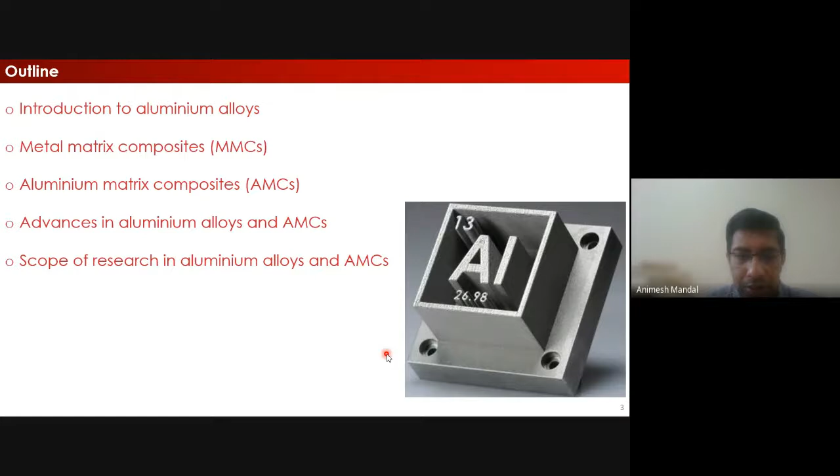As you must be aware, there is a great push for the use of aluminum alloys, especially with this Make in India initiative, and a great push for the manufacturing sector. So aluminum alloys are finding more and more use, and lots of investments are coming into this particular class of alloys. After steel, it's probably the aluminum alloys where lots of funding is going to come in the next few decades. That's the projection as far as aluminum alloys go.

To begin with, a very brief introduction to aluminum alloys. Aluminum lies somewhere here, and if you are aware of aluminum alloy literature, a good number of alloying elements have been added to aluminum to increase its properties, because aluminum is a very soft metal. Pure aluminum is very soft, right? It has a Vickers hardness of around only 20. So in order to increase the strength, corrosion resistance, and many other properties - nowadays people are also talking about high thermal conductivity aluminum alloys - different elements have been added to achieve properties up to various levels: silicon, phosphorus, you name it.

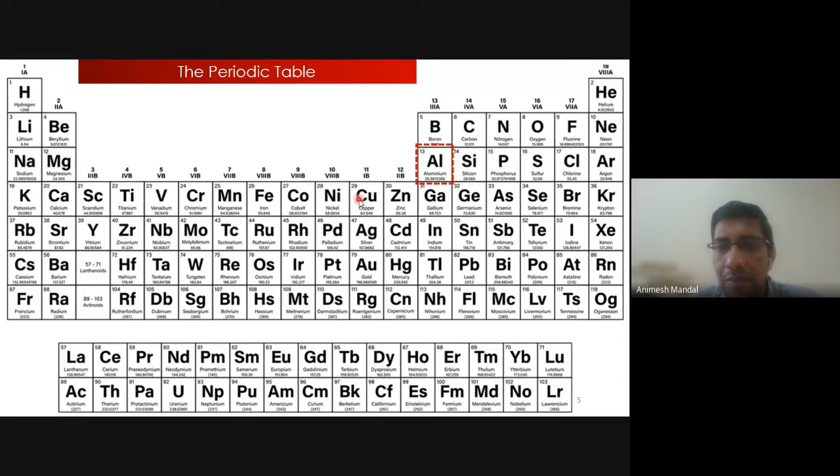So most of these elements have been added, so that interaction has been well studied, but there's lots of scope even more to study. With the advent of more and more advanced characterization techniques, new information is being revealed about your aluminum. So as far as your metals go, aluminum is considered a new metal because it was discovered quite late compared to copper, iron, or other metals. So aluminum is relatively a new metal in that sense.

So if you see the major elements which are added to your aluminum alloys, the major alloying elements added are copper, manganese, magnesium, silicon, zinc. Of course, lithium is not that common, but as far as ASM classification goes, it's still remaining. But these are some of the very frequently added major alloying elements.

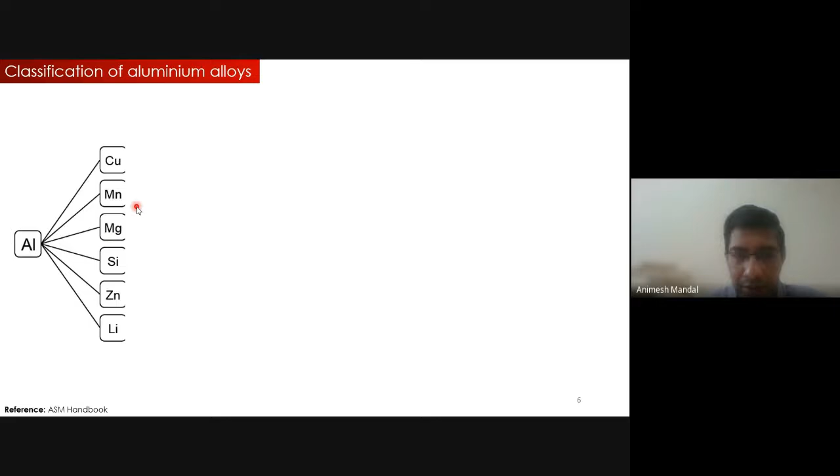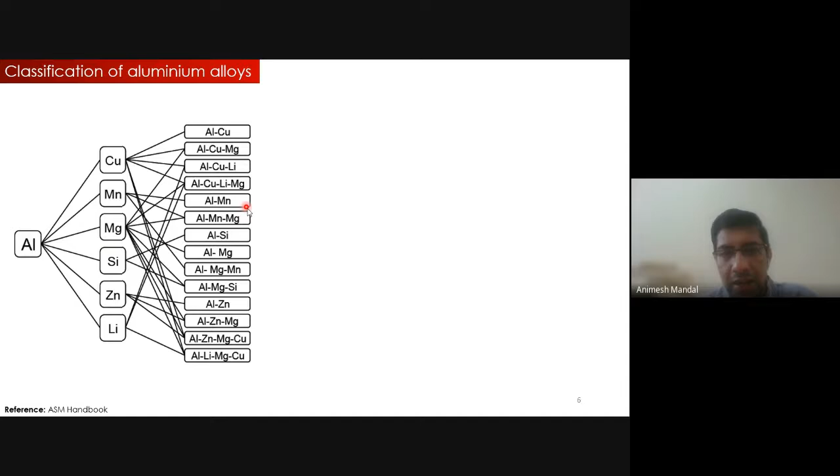So accordingly, you can have a range of aluminum alloys which can exhibit a wide range of properties. When I say properties, mostly we are referring to mechanical properties, but it could also be other properties as well. So depending on whether I can cast my aluminum alloy or not, or whether it can be further deformed, we have two broad ways of classifying these aluminum alloys. One is the cast aluminum alloy, and there's a certain ASM designation which is followed. I will not read out one by one since that's going to take a lot of time, but you can see these are some of the alloy designations.

So for example, let us pick the 2 series. When I say 2 series, it means that the major alloying element is copper. You can have other alloying elements as well, but the major alloying element is copper. Likewise it follows for others. There are certain unused series as well till date, and if we have any other alloying elements which do not fall in this particular category, you can club them under your 9x series. So that is how you classify.

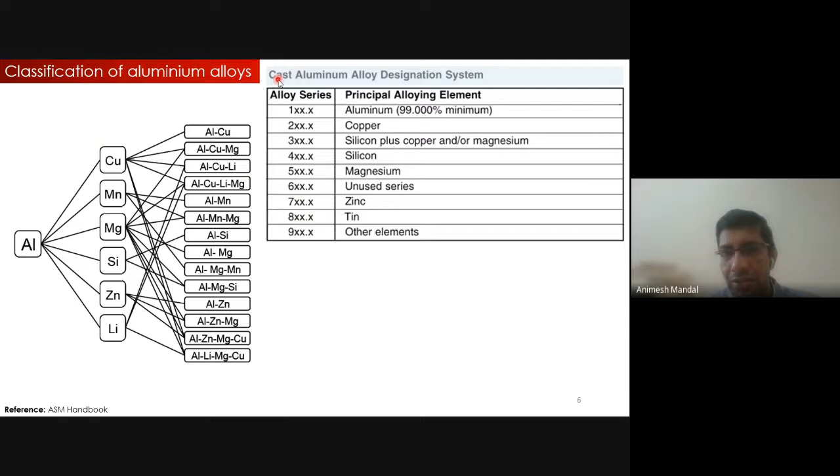It's nothing but a 3-letter designation followed by 1 decimal. These decimals also have some meaning, but I think we will not have so much time to discuss. If you have any doubts, we can discuss later on.

Then coming to the wrought aluminum alloys. As I say wrought aluminum alloy, it simply means that these are not the final product. In fact, they are the semi-finished product. That means it could be an ingot, it could be a billet, which needs to be further processed using some, say, mostly a plastic deformation operation like rolling, extrusion, forging, or any other plastic deformation for that matter.

And here, if you see carefully, this is a 4-letter designation. That's the nomenclature which we follow for your wrought aluminum alloys. Again, suppose let us pick one, say the 5 series. When I say 5 series of wrought aluminum alloy, what it means is that it is a magnesium-containing alloy. That means magnesium is the principal alloying element. Of course, you may have other alloying elements as well, but magnesium is the primary alloying element. That's how you need to understand.

So cast and wrought - all metals for that matter can easily be categorized into a cast category as well as a wrought category. Cast simply means that casting is the means by which you produce the end product, whereas in wrought metals, it means that you can further deform them to get the end product. So that's how you distinguish between a cast and a wrought aluminum alloy.

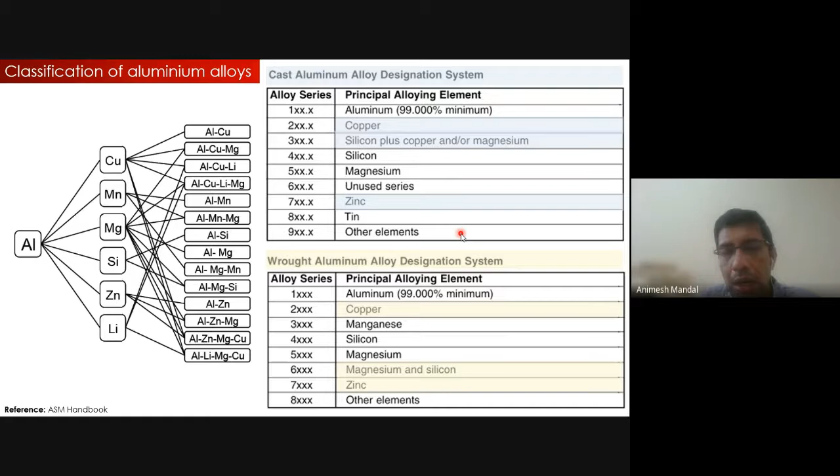When we teach students, we talk about different precipitation mechanisms which lead to hardness of these alloys, or increase in strength. So one thing is very important to understand: the solubility of these elements in aluminum impacts the properties of these aluminum alloys. That's very, very important.

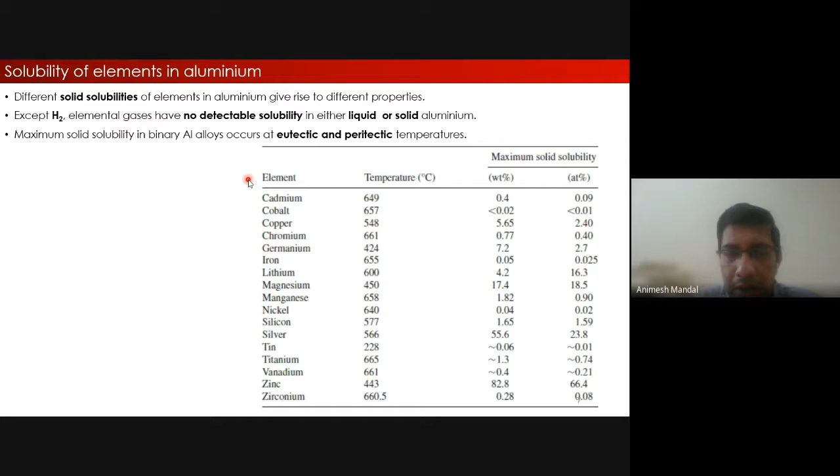That means if you do not remove this hydrogen before you cast this liquid aluminum metal into your molds, you're going to end up with different kinds of defects related to porosity, blowholes, wormholes - so many kinds of defects. That's why hydrogen is quite undesirable in your aluminum alloy. So you need to find a way to drive out this hydrogen from your molten aluminum. That's very, very important.

So that's one of the very key things when we talk about your aluminum alloy, when we talk about melting and casting of aluminum alloy. So that has to be kept in mind.

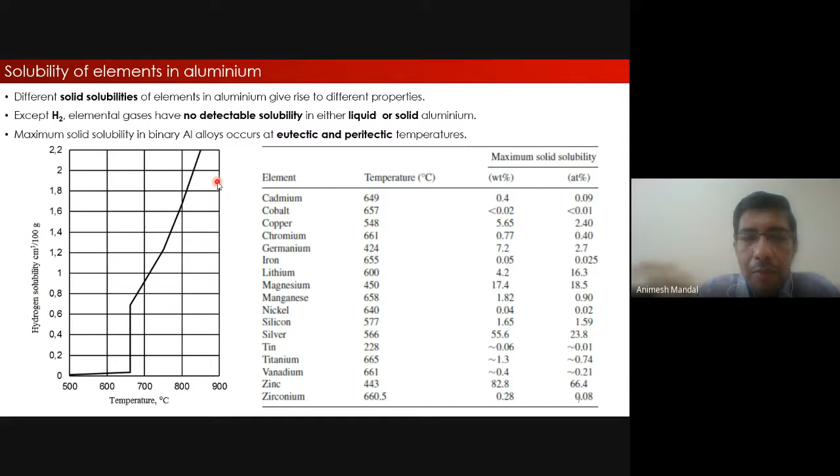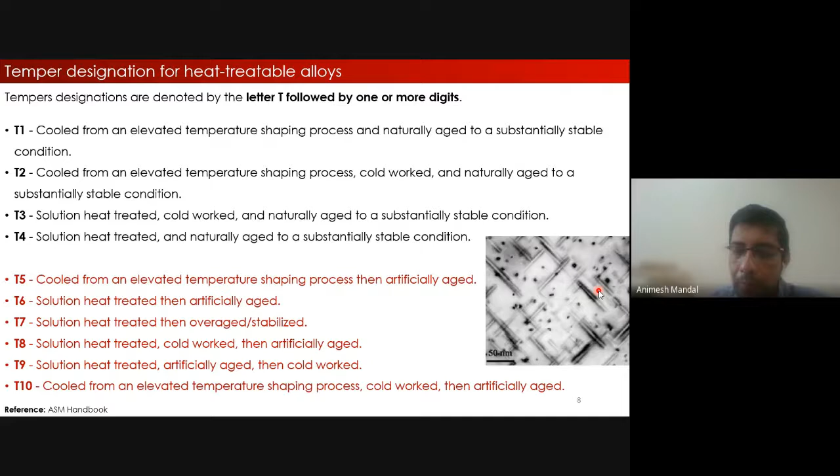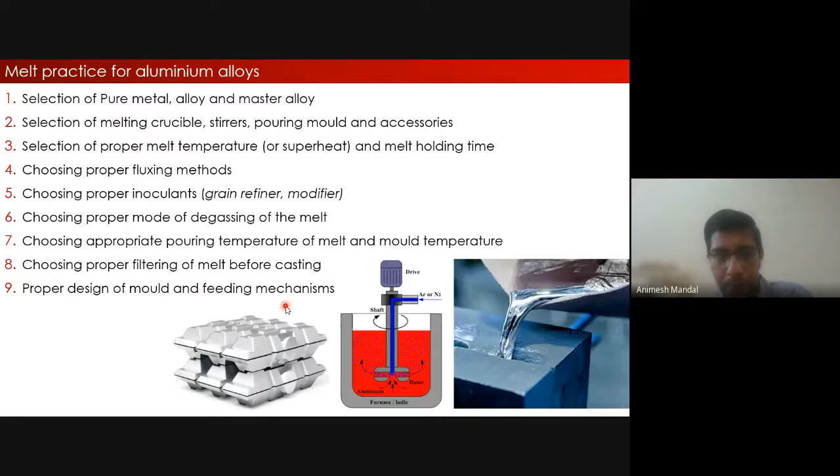So there are a series of steps which you need to follow so that you can get a really good microstructure, and most importantly, a defect-free casting. That's very, very important. If you have any doubts, you can ask me later and I can explain it to you.

Now going to a little bit of basics - I remember last time when I presented in one of the FDPs, I explained it in detail, so I'll quickly go through this.

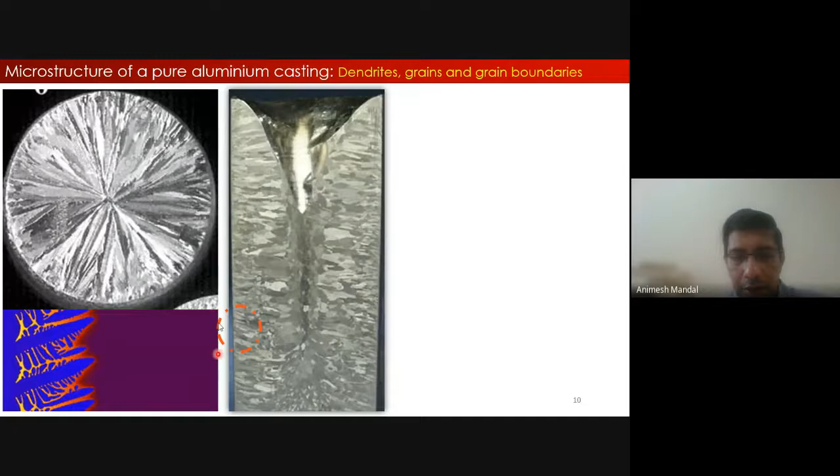For example, this is the casting, and this is the mold wall or die wall, whatever you can call it. Whenever solidification starts from this mold wall, what we get is essentially the formation of dendrites. These are called primary dendrites, and you have branching from the primary dendrites - those are called secondary dendrites.

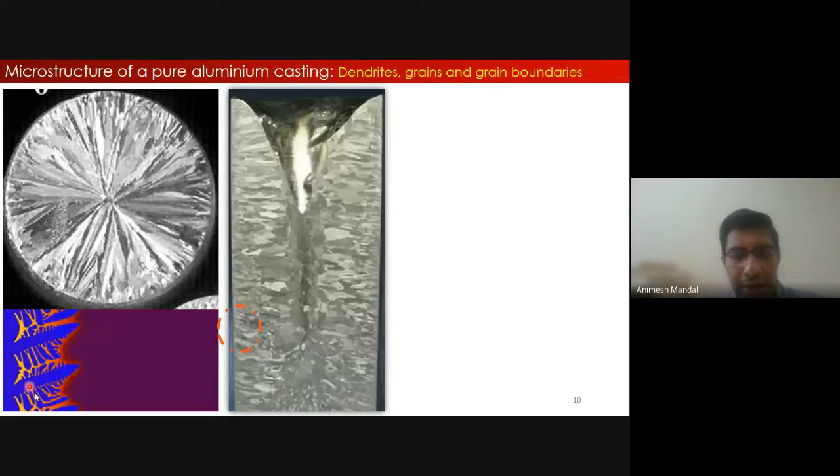The manner in which this particular phenomena - the growth of the dendrites - can be controlled is dictated by several factors. There are many factors which can control whether I will have a long elongated grain or if I can manage to have an equiaxed grain. That's possible to do using different techniques or processes.

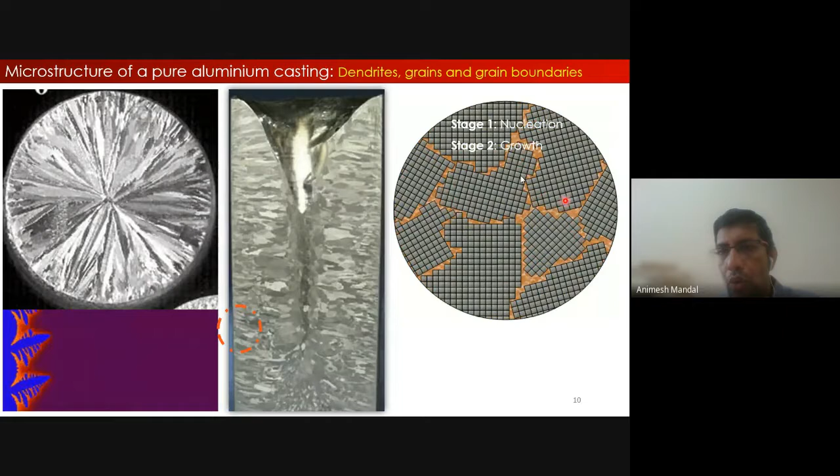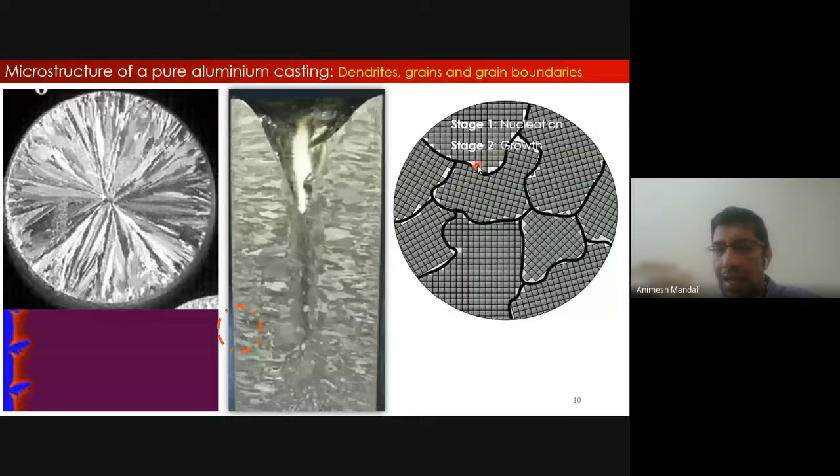Any solidification process can be divided into two broad phenomena. One stage is the nucleation stage, where some nucleation has to occur, and then the atoms get attached one by one in a periodic arrangement, thereby generating grains and grain boundaries. That's how the concept of dendrites, grains, and grain boundaries comes about.

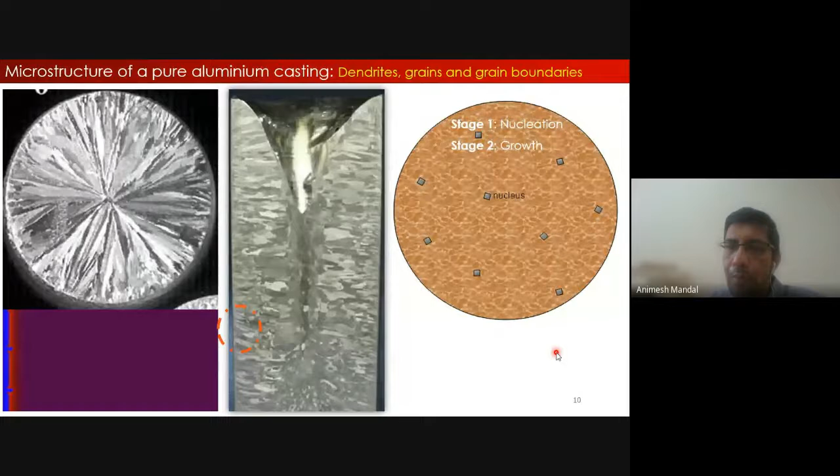Why is this of such significance? Because all of these have a very important role to play when you talk about the properties of your materials, be it any property for that matter.

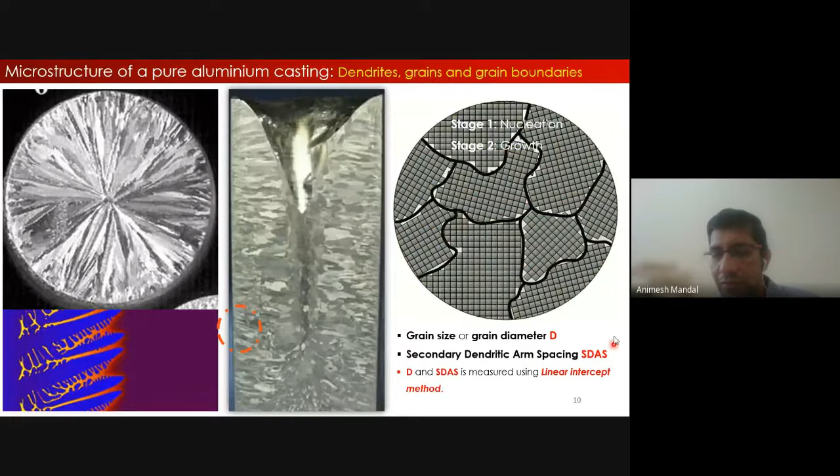So here we are mostly focusing on mechanical properties, though it could be any property. You need to precisely estimate the grain size or grain diameter, and also quantify the secondary dendritic arm spacing, which is the spacing between secondary dendrites. There are many techniques for this, one of the most popular being the linear intercept method. You need to take lots of frames of the microstructure, and nowadays there are softwares which give you these values, because you need to quantify the microstructure so you can relate it with the properties you get. That's very important.

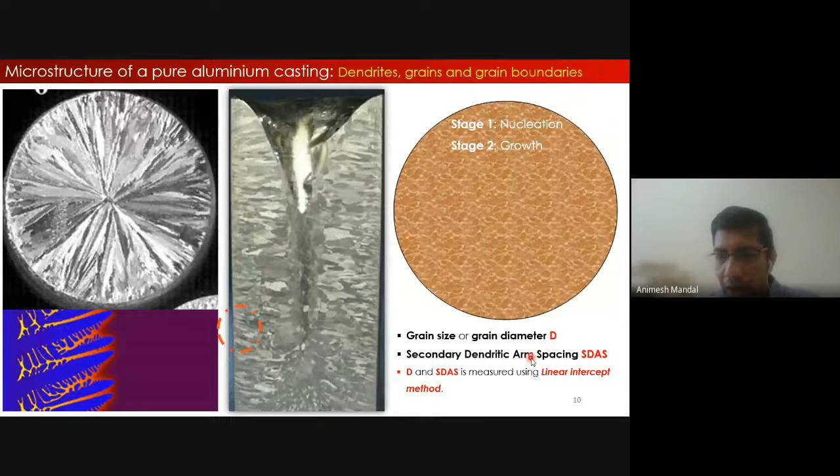So this is the basic about dendrites, the origin of dendrites, grains, and grain boundaries. Refining these grains is very important. There is an equation called the Hall-Petch equation, which talks about how the yield strength of a material is related to the grain size. As you have smaller grains, you expect to have higher yield strength in a material. So the basic idea of any metallurgist or material scientist is always to reduce the grain size of a material.

For example, this type of grain we call coarse columnar grains. How does this transformation occur in the first place? It's not going to happen on its own. You need to add something to this particular molten alloy, that means to this molten aluminum alloy, and thereafter, after solidification, you can expect this type of grains.

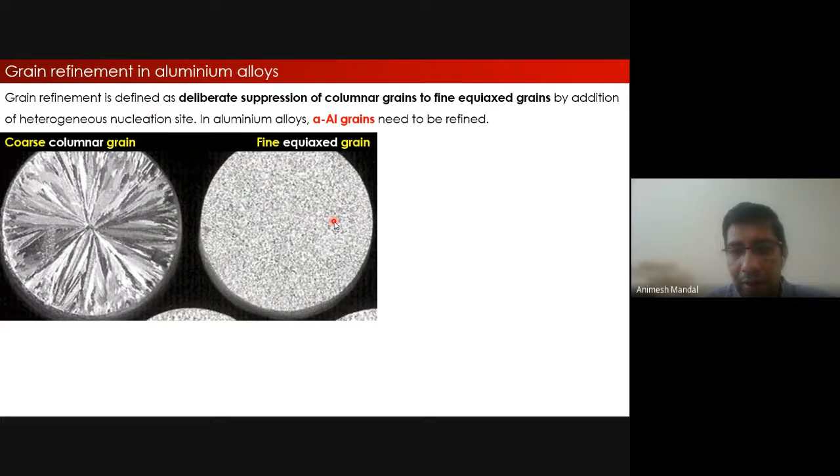So what is to be added? Certain particles, like Al3Ti in aluminum, and then there are certain particles like titanium diboride. They are very commonly added so that these particles act as substrates for nucleation of your alpha aluminum grains, and thereby you generate a fine grained material which is expected.

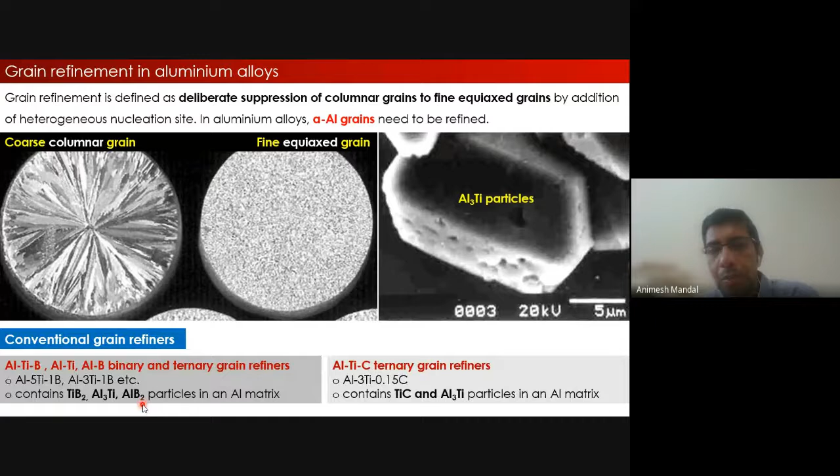Now there are so many kinds of grain refiners which are added. Traditionally you have aluminum titanium boron alloys which are added, aluminum titanium alloys which are added, and aluminum boron alloys are added. So all these binary and ternary alloys are added.

So what does this alloy contain? This alloy essentially contains these particles, and these particles, when added to the molten aluminum, act as substrates for nucleation of your alpha aluminum, and thereby you generate a fine grain material. So that's the basic understanding, and this mechanism is called heterogeneous nucleation.

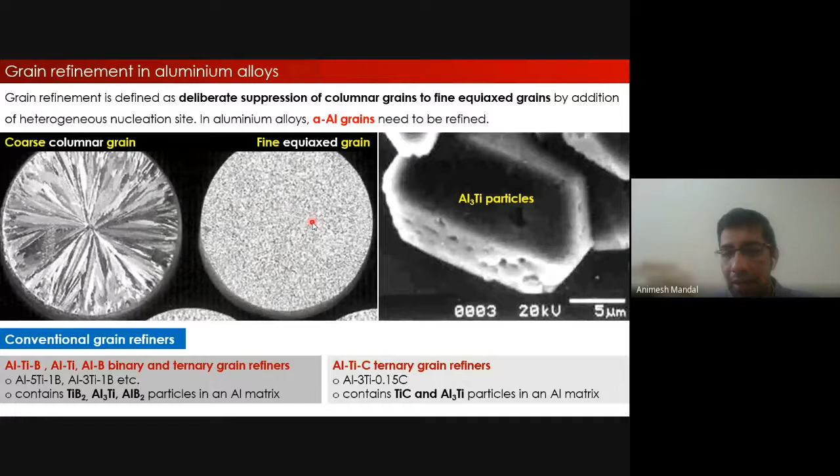Traditionally these are the types of grain refiners which have been used, such as aluminum titanium boron based or aluminum titanium carbon based, but all of these have certain merits and demerits, and that's why there is a need for new grain refiners. So many foundries are still working to develop newer and newer grain refiners so that you can get a very, very fine grain material.

This is something which is desirable, you don't want this kind of microstructure. So why do we need fine grains? Though we spoke about strength, it's not only the high yield strength that is improved by having a fine grain structure.

If you have fine grains, your toughness improves. There is something called hot tearing, meaning you will not see any cracks on the surface of the castings. Then if you have fine grains, you also have a uniform distribution of the other phases, uniform distribution of the microporosity. You can also improve the extrudability of that particular alloy, and machinability increases many folds, and as a result you get good surface finish.

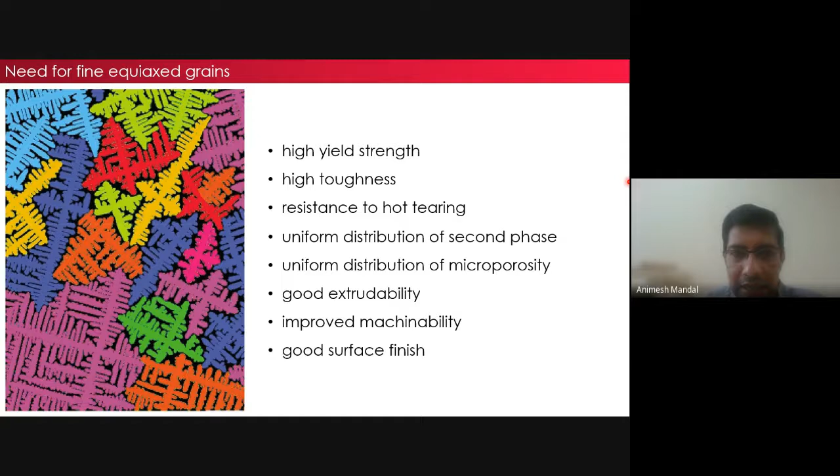So generating a very, very fine grain material is very crucial to achieving a good casting. That means for all the foundries, the very objective should be to refine the grains as much as possible. Some of the casting techniques used for wrought aluminum alloys include many casting techniques, but these are two very important techniques used worldwide. One is your direct chill casting, where you produce huge ingots or billets.

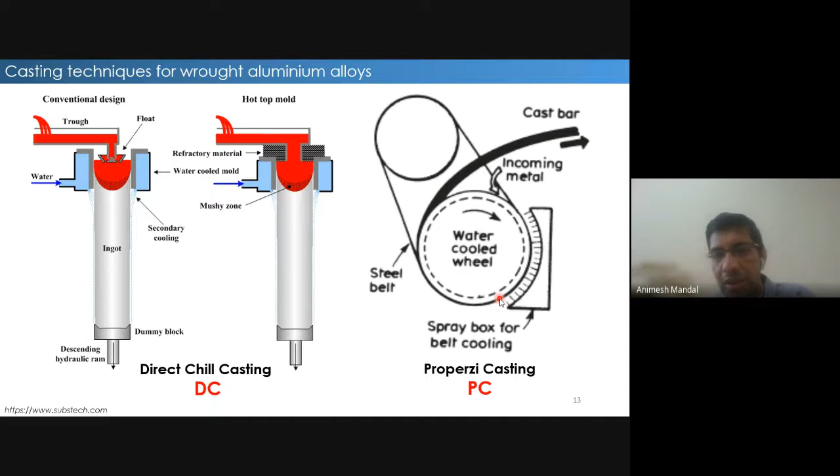So these are the two techniques which are majorly used for producing these wrought aluminum alloys, because which has to be further deformed. Just to share you the pictures, you can see.

So this is how your DC cast ingots look. These are the actual DC cast ingots which you are seeing here, and these are the Properzi ingots. You can see it's almost rectangular in cross section and long elongated. These can be further deformed, whether it may go to a forging plant, a rolling plant, or any other plant.

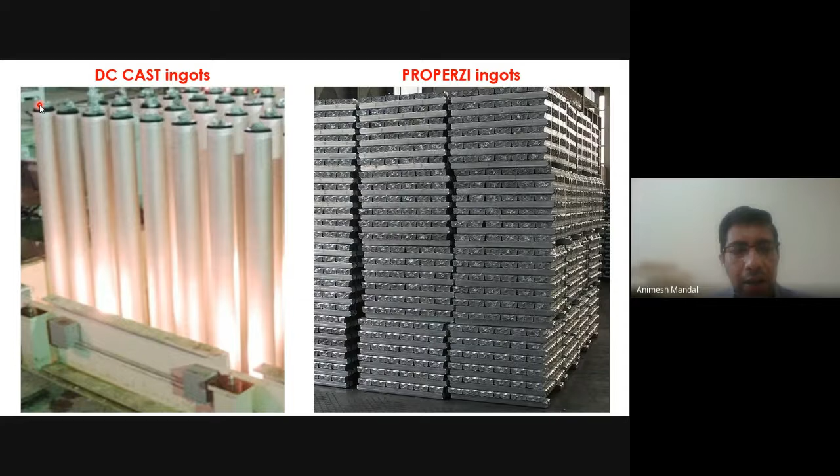So the process looks quite simple, but there are lots of challenges to make this. Almost you can see it's a defect free sample. To make this, of course, requires lots and lots of science and technology has gone into making a defect free sample.

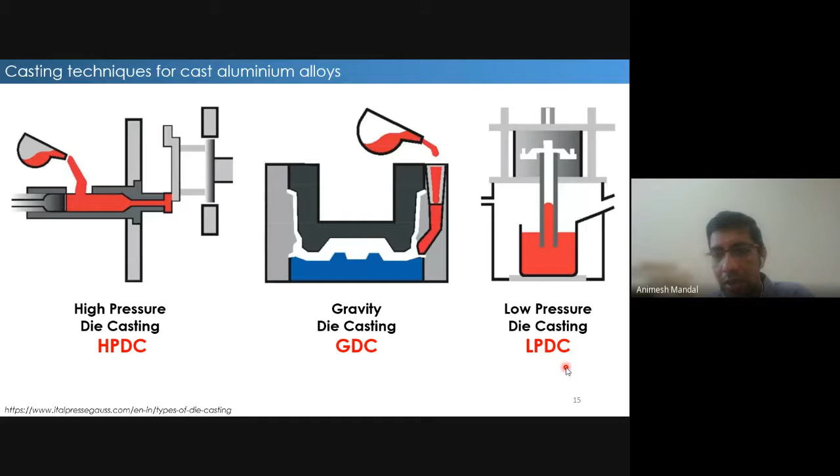Industries use these processes quite profusely. Among these cast aluminum alloys, the most popular systems are your aluminum-silicon alloys. We hardly use any binary alloy for practical purposes, so it's a multi-component alloy, and the most important alloying elements added to aluminum-silicon alloys are magnesium, copper, or a combination of copper and magnesium.

That's very commonly used, because if you add magnesium and copper, or both, you impart precipitation hardenability to the alloy. Aluminum-silicon alloy by itself is not precipitation hardenable, but the moment you add magnesium, it generates particles called Mg2Si, and you can create precipitates of Mg2Si. Similarly, if you add copper, you can create precipitates of Al2Cu.

Likewise, if you add both, you can have different kinds of precipitates. So essentially, by adding these alloying elements, you're converting a non-heat-treatable alloy into a heat treatable alloy. Why is that important? Because you can increase the strength of these alloys through proper heat treatment.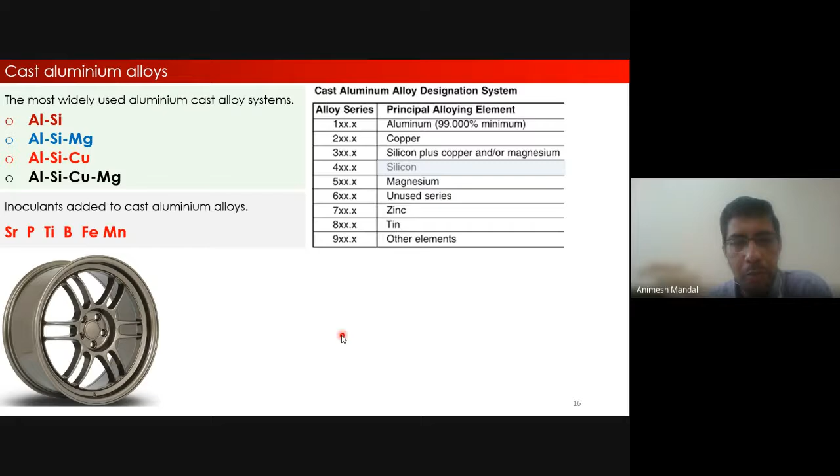If you recall the basics of a binary phase diagram, the aluminum-silicon alloy has a eutectic composition. The alloys towards the left of the eutectic are called hypoeutectic alloys, and the alloys towards the right of the eutectic are called hypereutectic alloys. Accordingly, the microstructures can vary.

The silicon present in eutectic as well as hypoeutectic alloys is needle in shape, almost needle-like. In hypereutectic alloys, in addition to the needle shaped silicon, you also have primary silicon, which is quite coarse. Both of these morphologies, the needle shape and the polygonal primary silicon, are generally not desired in this kind of alloy.

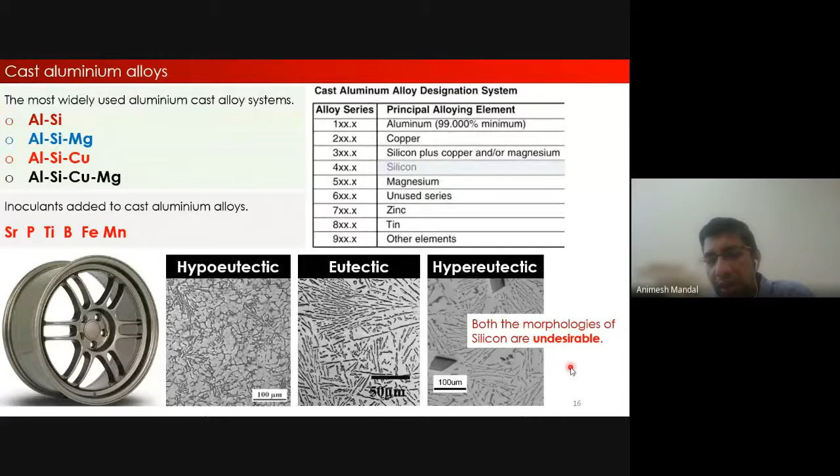So how do you modify this morphology? You can modify the morphology of the needle shaped silicon as well as the polygonal primary silicon using elements like strontium and phosphorus in different amounts. This is something you need to understand: a very trace amount, maybe on the order of a few ppm, is good enough to change the morphology of these alloys.

So this is, in very brief, about your wrought aluminum alloys and cast aluminum alloys. Whenever you hear about cast aluminum alloys, the first alloy system that should come to your mind is the aluminum-silicon alloy. It's the bread and butter of the casting industry, because most casting processes demand very good fluidity or castability, and you have to have silicon in it, because addition of silicon improves the fluidity of the alloy for various reasons.

Now coming to your metal matrix composites. As all metallurgists as well as mechanical engineers must be aware, you deal with a good amount of composites.

So like a lot of people work on polymer matrix composites, and a good amount of people work on ceramic matrix composites. But here what we are going to discuss briefly is the metal matrix composites, in short we call that MMCs.

If you see the scenario of MMCs, this is a Scopus document which I tried to grab. You can see there is great interest in MMCs. Though this data is till 2015, it shows a steady rise. There is great demand for MMCs, and this shows the number of publications year wise. Initially, work on MMCs picked up maybe in the late 80s. There you can see a surge in use of MMCs, not only publication wise but even use wise.

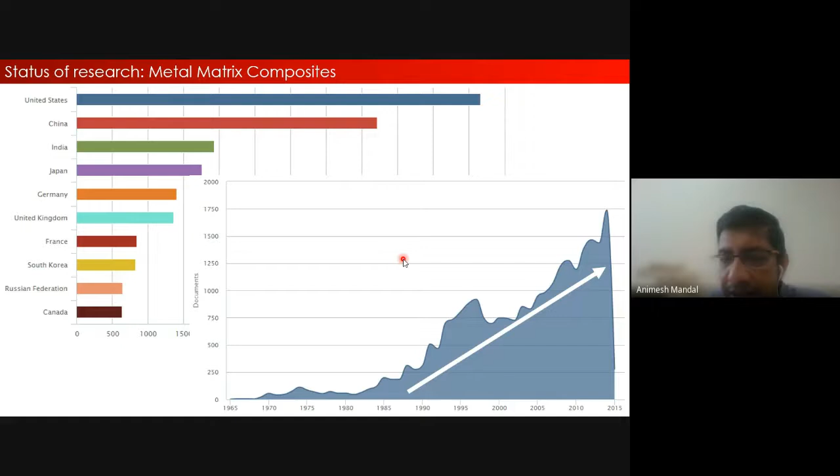As you must be aware of, this is very common - these are the important components of a composite material. As you know, the matrix is the bulk phase or major phase, and you can have this reinforcement, though I have drawn this reinforcement as if it's a particulate, so it could be in either form.

It could be a fiber, it could be a whisker. The only requirement is that it has to be a ceramic or a metal or an alloy with a very high melting point. So it could also be an intermetallic. The reinforcement could be anything, and its morphology could be any of these - particulate, fibers, or whiskers.

The third important thing which should be given lots of emphasis - at least materials engineers deal with this in quite detail - is the interface, which is very often ignored. But it should not be ignored. Interface plays a very crucial role. So what is the interface? The interface between the reinforcement and the matrix.

If you examine the interface, as far as possible it should be as clean as possible. That means if you look into this interface using a scanning electron microscope, you should be able to see that you do not form any interfacial products in this interface region, because if the interfacial product is weak, it can deteriorate the overall mechanical properties, or for that matter any properties of your composite. So the interface plays a very important role apart from your matrix and the reinforcement.

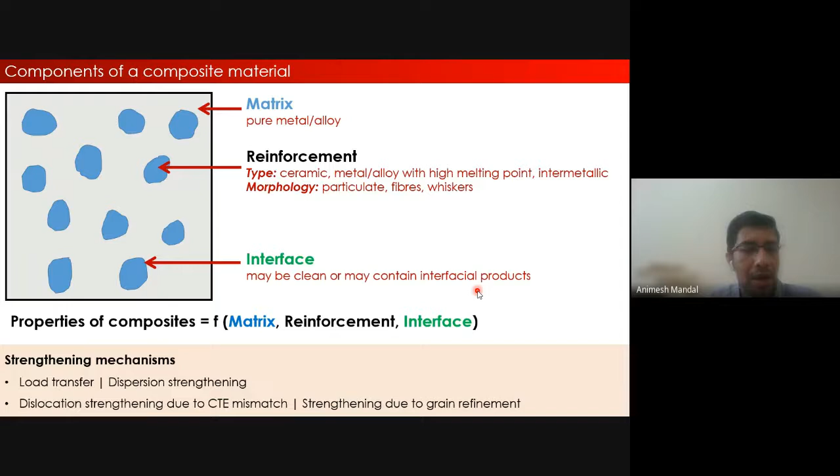Because if you see the strengthening mechanisms, if you are aware of the several strengthening mechanisms which we cover in a typical metallurgy course - load transfer mechanism, dispersion strengthening mechanism, dislocation strengthening due to coefficient of thermal expansion mismatch, or strengthening due to grain refinement - all of these factors, and there are a few more, are some of the important strengthening mechanisms. They can be influenced by this interface. Because if the interface is weak, all of these could be affected severely. That's the reason characterizing the interface in a metal matrix composite is very important.

So in a typical composite material, to show you one example, this is an aluminum titanium diboride composite, which people are working on. I have also worked a great deal on this particular composite. You can see the interface between your aluminum and your TiB2. This is from a paper by one of the authors. You can see the interface is pretty much clean, meaning you do not have any such products formed between your aluminum and the reinforcement. That is one of the very important aspects of your interface.

Focus should be laid on the interface because it occupies a large area in your composites. The interface becomes more important especially when you're dealing with metal matrix composites and ceramic matrix composites, because the processing temperatures are quite high. At those high processing temperatures, there are chances that you may end up having some reaction products at the interface. It may not be that significant when dealing with room temperature processing, or very low temperature processing, but in metals, all the processing is generally done at relatively high temperature. So characterizing the interface becomes very important.

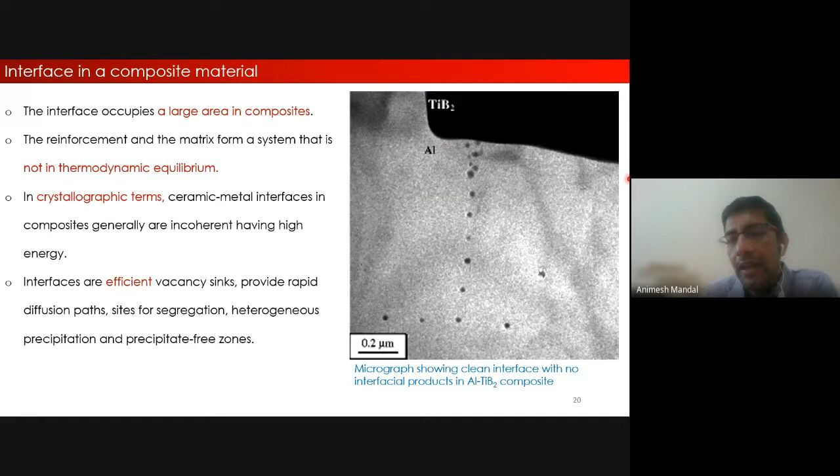So that's why you need to understand the importance of the interface in your metal matrix composites, because it can influence the properties quite significantly. It's not only about the matrix and the reinforcement, but also the interface. So whenever you choose any particular processing step, you need to be very sure that you do not form any interfacial products whatsoever. That's very, very important.

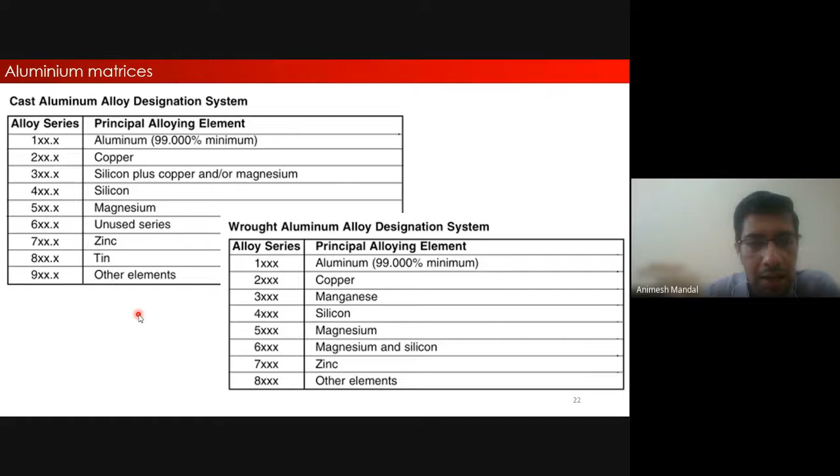Coming to your aluminum matrix composites, as we have already discussed, you can use any matrix for that matter. Whether you want to produce a cast metal matrix composite, or whether you want to produce a wrought aluminum metal matrix composite, you can choose the matrix as per your need, or as per the application.

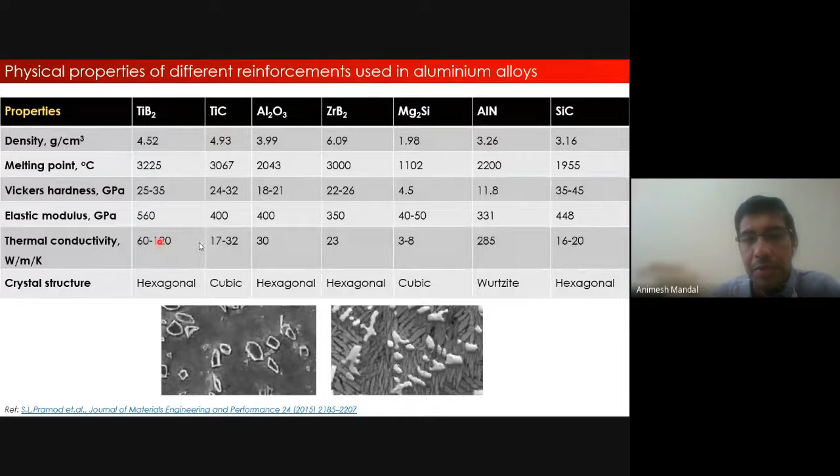You can see, except for your TiB2 and your aluminum nitride, all of these have relatively lower thermal conductivity. So that's another area where people are working on, searching or looking for a particle which has relatively higher thermal conductivity, so that you can make a composite without sacrificing the thermal conductivity of that particular alloy. So there is a need for development, to generate or look for some particles which have relatively higher thermal conductivity.

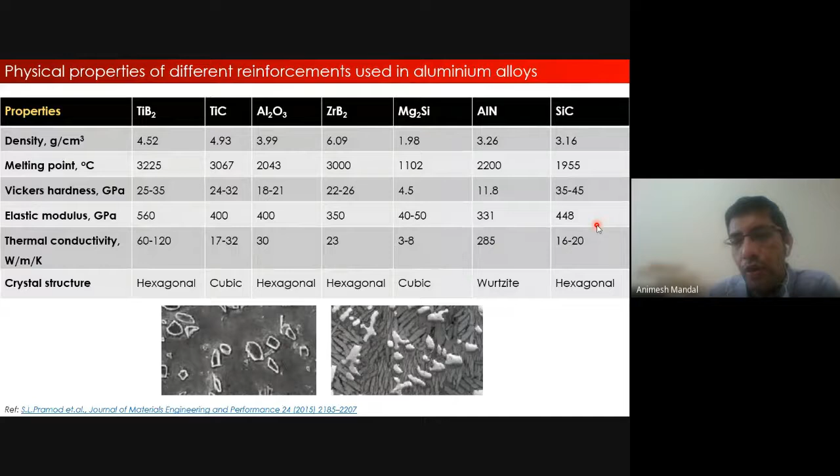And of course, as I told, nowadays people are focused on this since one of the main attributes of making your metal matrix composites is having higher elastic modulus, because you're introducing a phase with higher elastic modulus. So the overall elastic modulus is going to increase significantly.

Just to summarize this, your Ashby plots - if you are aware of these - an Ashby plot is nothing but, you can pick any two properties and it will generate this kind of plot. So what it gives you is an overall idea for selection of materials. For example, you know that metals have a little bit higher density, strength, and the modulus is quite high. Similarly, for ceramics, it's quite high, and composites are somewhere in between. So this particular graph gives you an idea of the different properties of your material at a glance.

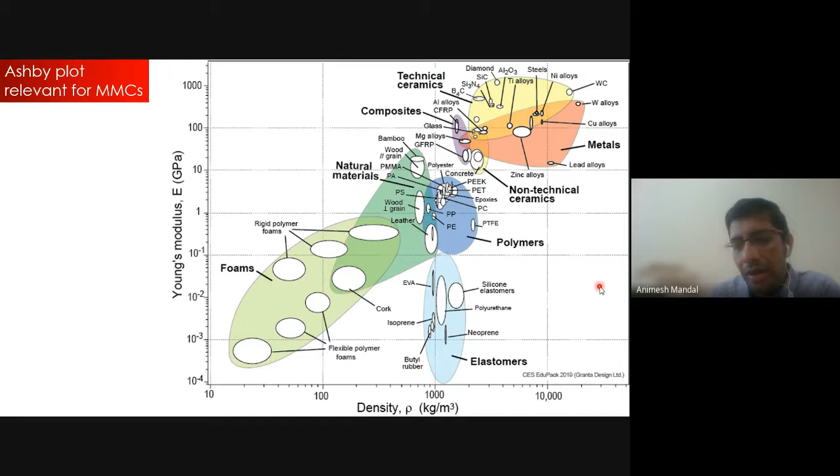Just to make it a little more neat, you can see this particular diagram - it's the same diagram, but other content has been removed. You can see metals lie here, the ceramics, which are nothing but the reinforcements, lie here, and as a result the composites are somewhere intermediate. So that means you are getting a balance between the properties of your metals and ceramics. Ashby plots can be very useful for zeroing in on material properties, or it's generally used for selection of materials.

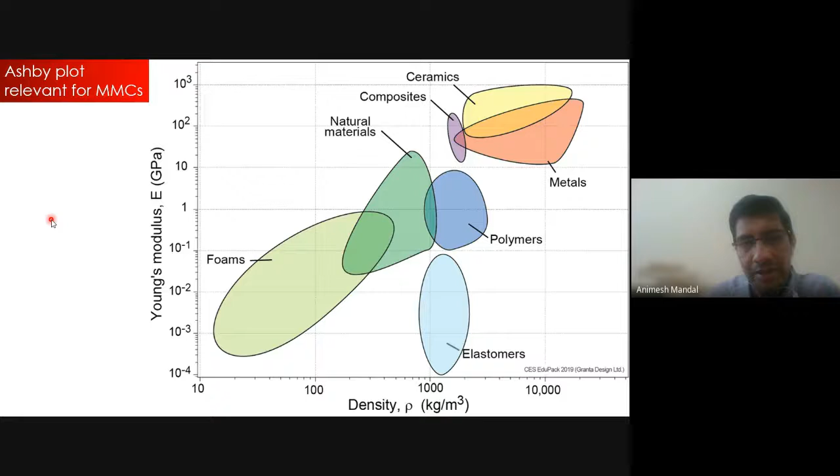How do we process this aluminum matrix composites? There are n number of processes available by which you can process aluminum matrix composites. Solid state processing is quite common, which we are not discussing in this particular talk. As you're aware, some of the very common solid state processing techniques are powder metallurgy, friction stir processing, microwave sintering, and spark plasma sintering. These are very, very common.

As far as liquid processing goes, since we are talking about castings, infiltration is one of the common techniques. That means you can infiltrate the liquid metal through a preform of your reinforcement. That means you need to make this preform of your reinforcement, and you can pass or infiltrate the liquid metal through that preform. So that's one way of making composite, and this is used generally when you want to have a higher volume fraction of reinforcement in the composite.

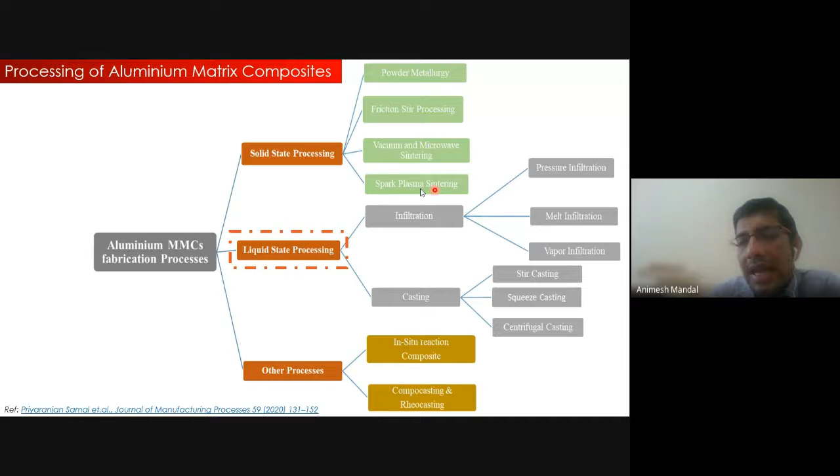Otherwise, casting is one of the most popular techniques by which you can make your composite. Again, there are so many casting techniques - stir casting, squeeze casting, centrifugal casting. There are many more techniques by which you can make this composite. But there are certain limitations of casting, because you may not be able to introduce a high volume fraction of reinforcement in a typical casting process because of fluidity issues. So in that case, you have no other choice but to go for infiltration techniques. There are other processing techniques available, but these are some of the very popular techniques used for processing aluminum matrix composites.

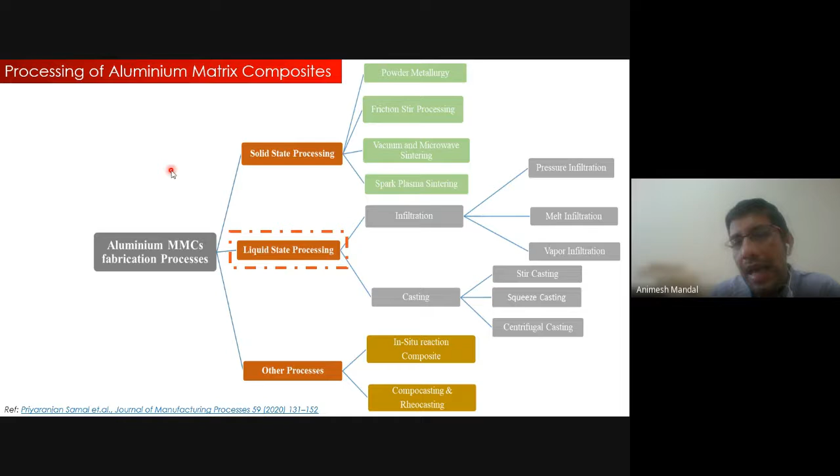For example, you can further categorize your aluminum matrix composites, as far as processing goes, into two categories. One we can call conventional aluminum matrix composite - for example, if you take a reinforcement and add it to the molten aluminum alloy of your choice. That's how you produce your conventional composite. That means you already have the ready-made reinforcement, and you need to find a means of introducing that into your liquid aluminum and finally solidify it.

This particular slide shows you the different types of aluminum silicon carbide composite that is possible. In the first one, you have fine silicon carbide particulates. In the second case, the silicon carbide particles are relatively coarse. Whereas in the third, it's a mixture - a combination of coarse as well as fine silicon carbide. And you can see all of these microstructures are different.

So as a result, you can generate different kinds of properties in all of these composites. In the same silicon carbide, just by changing the size, and not only that, by changing the volume fraction, you can play with the properties.

Then the fourth case, this is a silicon carbide fiber made using a certain technique, most probably an infiltration technique. So you can see this is also a composite where fibers of silicon carbide have been introduced, and of course the properties of this particular composite are going to be entirely different from all of these.

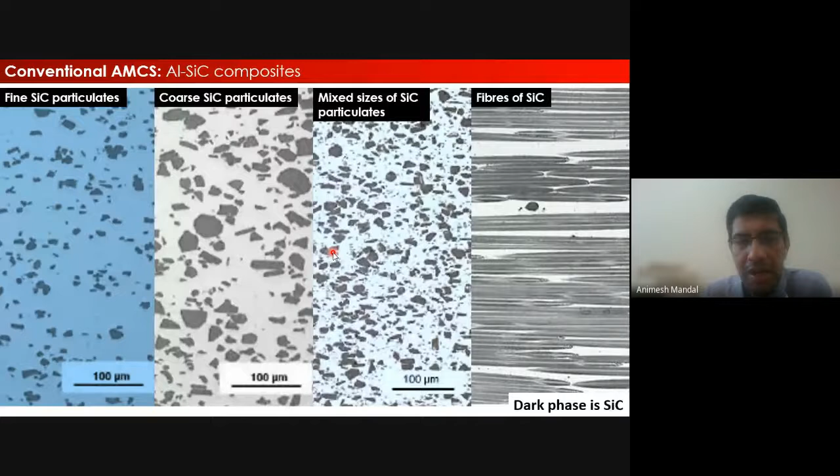The other class of composites we can call in situ composites. In this case, you do not add the particles from outside directly. Rather, you add certain raw materials which will react within the melt, and as a result it will form those reinforcements.

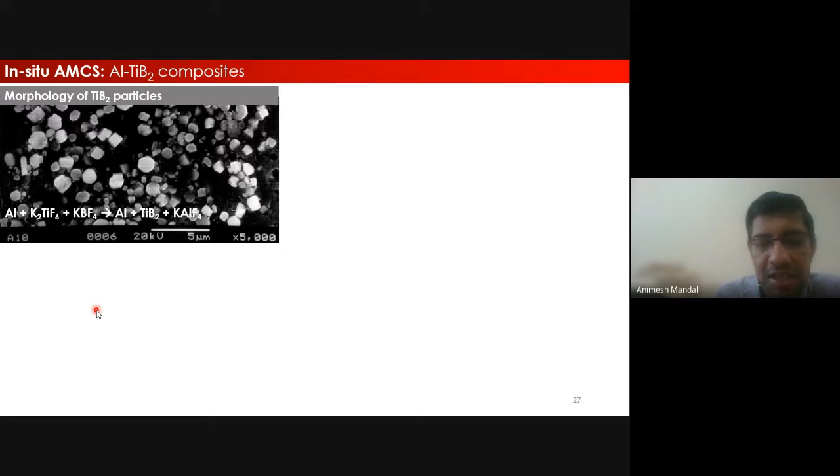The only issue with these in situ composites is that, yes, the particle sizes are really fine, but the problem is agglomeration. These particles tend to agglomerate with one another, and as a result people have devised certain techniques to at least minimize the agglomeration.

For example, if you do certain plastic deformation like equal-channel angular pressing, you can de-agglomerate, or at least break those agglomerates and disperse them within your matrix, and as a result you can expect better mechanical properties.

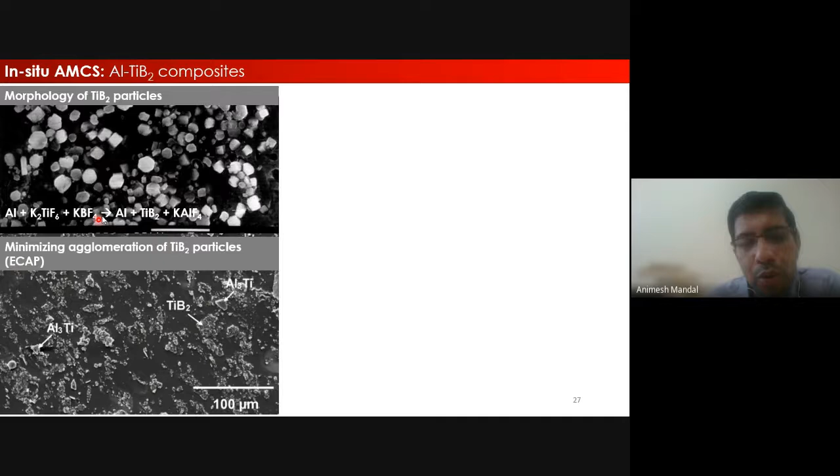Similarly, if you have different amounts of these particles in your aluminum-4-copper alloy, for example, this is the aluminum-4-copper alloy, and these are the composites, four different composites with different weight fractions of titanium diboride. So what does this plot show?

Let us first look at the aluminum-4-copper alloy, the round dots in this plot. As you age, meaning heat it at a certain temperature, you can see you attain a maximum hardness followed by a drop. This maximum hardness is called peak hardness, and here the time taken for peak aging is almost close to 40 hours.

But when you add particles like titanium diboride, the hardness is expected to increase, but not only that, the time taken to reach this peak hardness comes down to very close to around 10 hours or 8 hours.

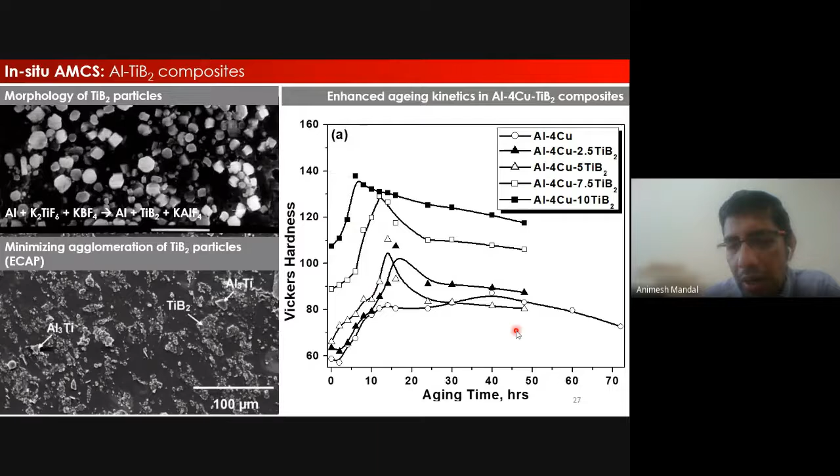That means from 40 hours in an alloy, by adding reinforcement, you have brought down the peak hardness time of your composite. So what it's doing is enhancing the aging kinetics. Having a composite is beneficial for accelerating the aging kinetics, meaning precipitation of Al2Cu present in this alloy can occur in much lower time, a significant improvement. For example, you have reduced the time from 40 hours all the way to 8 hours, which has significant industrial implications since you're reducing the heat treatment time.

The other application of your composite is that you need to make a composite when you want to make a metal foam. If anyone is aware of metal foam, like the foam you produce in polymers, even metals can be made into foam. For that to happen, you need to make a composite.

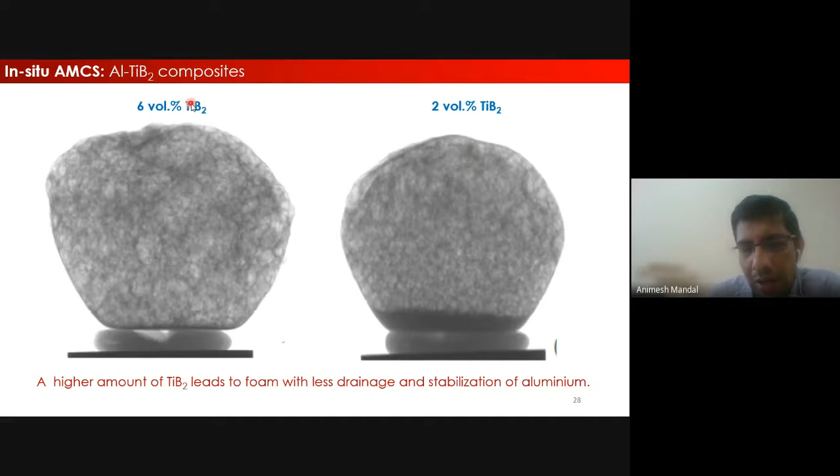Here I'm showing the example of titanium diboride, but you can choose any reinforcement, though it has to be optimized depending on size and volume fraction. With 6 volume percent TiB2, it's able to give a very nice stable foam. Whereas with a lower amount of reinforcement, you can see a dark shaded area at the bottom of the foam, which we call drainage of liquid. This means the foam is not stable, and drainage is taking place, related to the amount of titanium diboride present. So you need a higher or optimized amount of this reinforcement to create a stable foam. That's another application of the foam.

This is how it works, and I'm not discussing how this foam was produced in detail. Typically it is produced using titanium dihydride, which is a gas releasing agent, used for producing these kinds of foams.

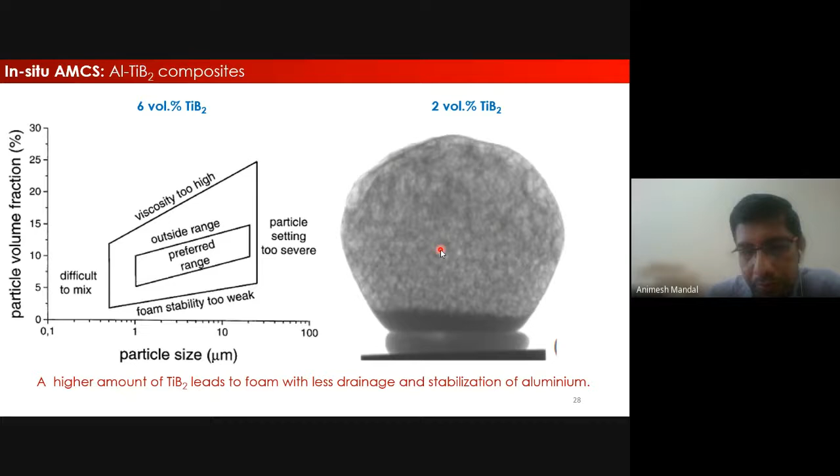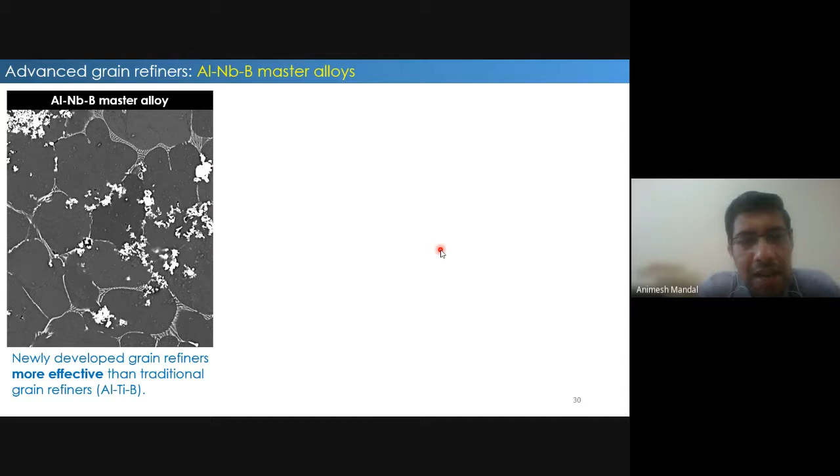Now to summarize some advances and what's new in the aluminum sector: as we spoke about grain refiners, aluminum-titanium-boron master alloy was very commonly used. Nowadays people are looking for aluminum-niobium-boron master alloys, or grain refiners, as you can call them.

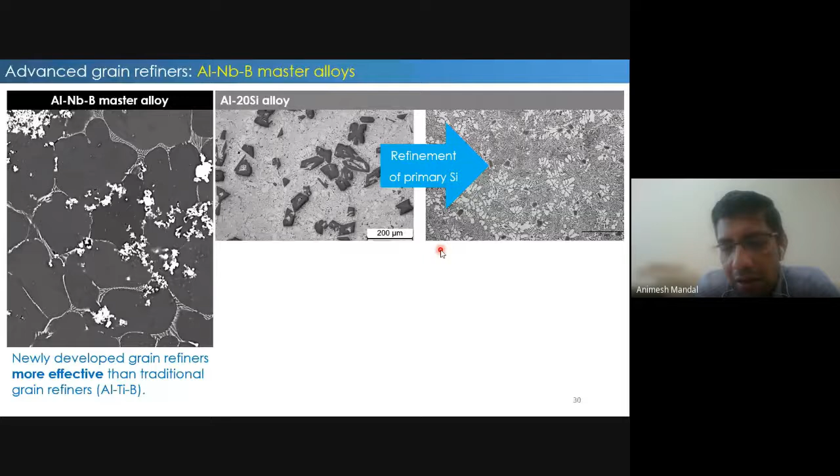These have certain advantages over traditional aluminum-titanium-boron master alloys. For example, it has been tried out in certain hypereutectic aluminum-silicon alloys, and you could see that you can not only grain refine the alpha aluminum, but also the primary silicon using this master alloy. Even with pure aluminum, you can achieve refinement of primary aluminum using this. That means you can simultaneously grain refine primary aluminum as well as primary silicon, which gives certain advantages of this aluminum-niobium-boron master alloy over aluminum-titanium-boron master alloys.

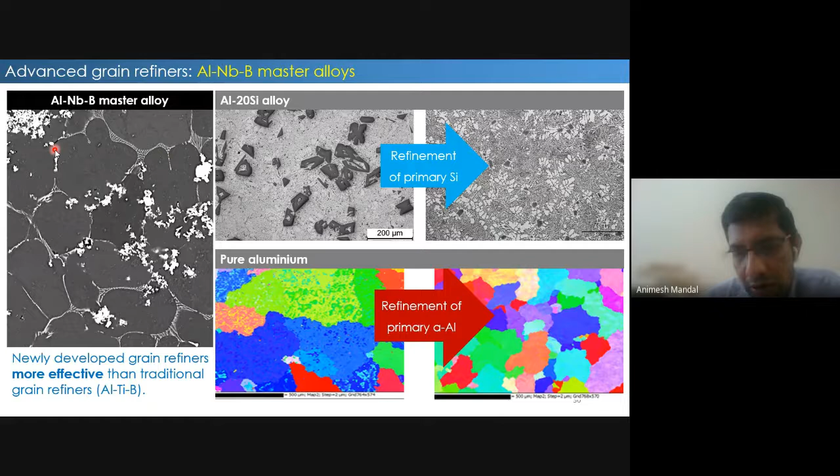The other thing is nowadays people are working a lot on the development of hypereutectic aluminum-silicon alloys. That's another important area, not only for improving mechanical strength but also to improve wear resistance of certain components. Aluminum-silicon alloys, especially the primary silicon, play an important role in improving wear resistance of these alloys, though I'm not getting into the details. One such study was done using different amounts of magnesium.

This particular study shows that if you continue adding magnesium to your hypereutectic aluminum silicon alloy, which contains primary silicon, the mechanical properties are sometimes not desirable. So the study was carried out to see what happens to this primary silicon if we keep increasing the amount of magnesium.

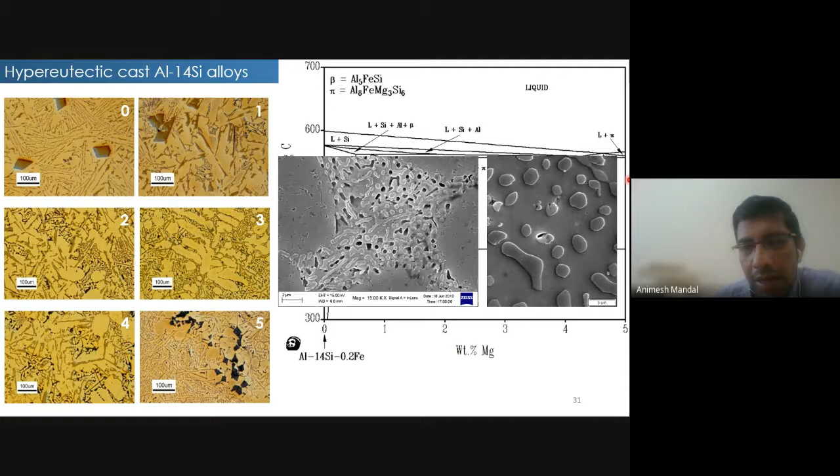Indeed, if you keep adding magnesium to this hypereutectic aluminum silicon alloy, there is a complete suppression of the primary silicon, and that was something we were aiming at, because in that case you can have an alloy with reasonable strength and also very good ductility, since you are suppressing the primary silicon.

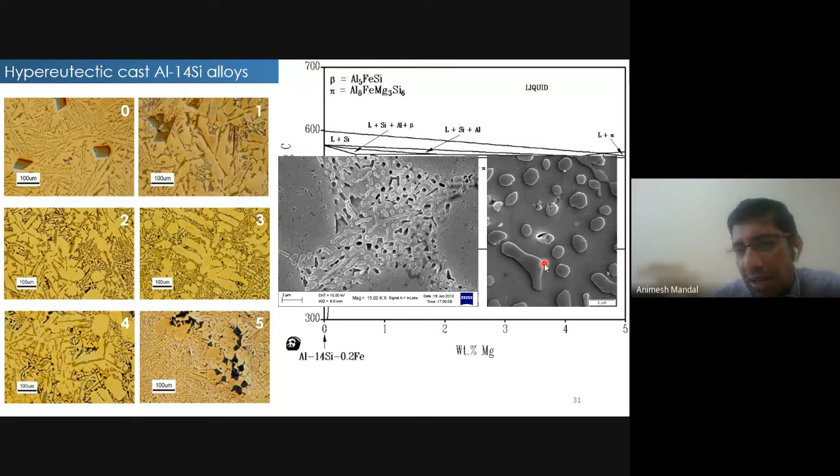If you further heat treat this alloy, you get Mg2Si phases and the silicon becomes almost globular, spheroidized, meaning it's almost round in shape, and this contributes to the improvement in ductility of your alloy. So another area we are working on is whether addition of low quantities of certain oxides could decrease the size of your primary silicon.

Whether adding low quantities of certain oxides could improve or decrease the size of your primary silicon - and indeed it works, because Al2O3 is a relatively cheap reinforcement particle, so it is quite effective in refining this primary silicon in your hypereutectic aluminum silicon alloy.

Similarly, we tried casting the same alloy using a technique called suction casting, which is a very high cooling rate process. So it's also possible to generate almost nano-sized eutectic silicon, because if you see, not the entire volume fraction, but there are points.

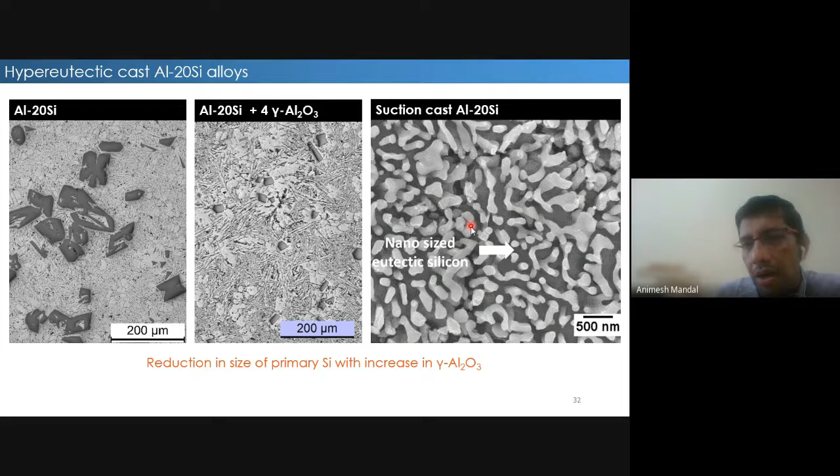You can see from this particular microstructure - this is a 500 nanometer bar, so this is quite less than 100 nanometers. So it's possible to generate nano-sized eutectic silicon using a fast cooling rate process, and the properties we have achieved for this are quite exceptionally high for a normal hypereutectic aluminum silicon alloy.

As far as processing goes, last time, even in the last FDP, I discussed about this process. This is a relatively new process as far as your aluminum alloy goes - it's a modified version of a sand casting process, called ablation casting, where you ablate or erode away this particular sand mold using a jet or spray of water.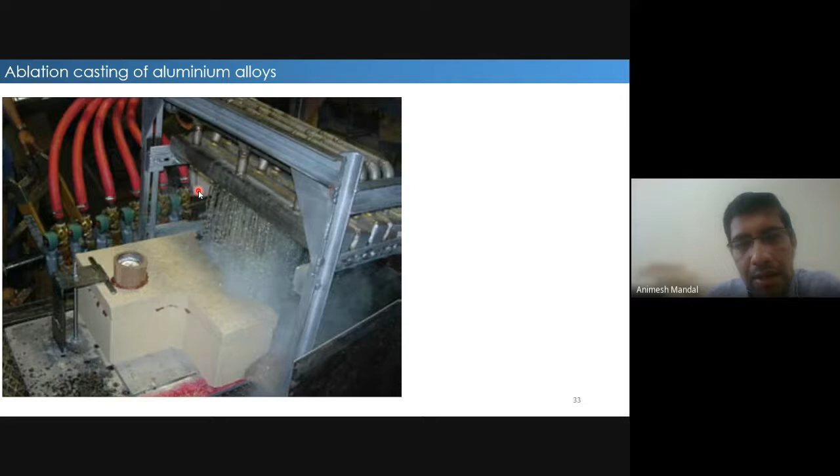This is possible, and the reason is this technique has lots of merits because you can achieve a very very high cooling rate in this particular casting, which otherwise you do not achieve in a typical sand casting process. As a result, you get a very fine microstructure, which I'll show you in the next slide.

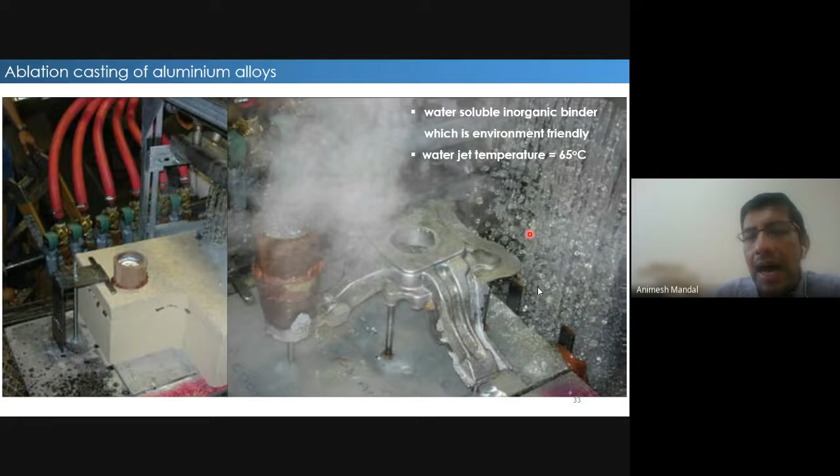The trick or secret is using or designing an inorganic binder which is soluble in water, so that as your solidification proceeds and you start this jet of water, immediately your sand gets ablated due to this jet of water, which is generally kept at 65 degrees centigrade. As a result, you achieve an extremely high cooling rate in this modified version of sand casting.

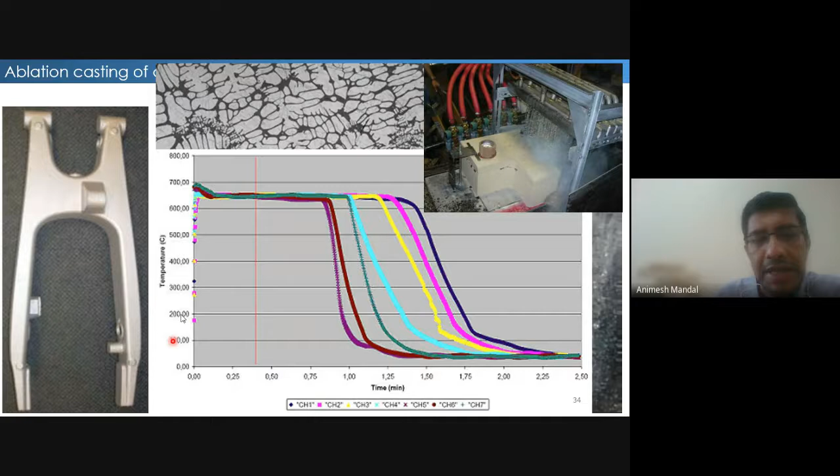You can see the microstructure is very fine - you are hardly able to see this eutectic silicon, which is very fine. The cooling rates experienced are very close to those achieved using a metal mold. That's the beauty of this process, and as a result, even Hero Honda is already using this particular process to produce certain auto components. So another interesting process is a very low cost one.

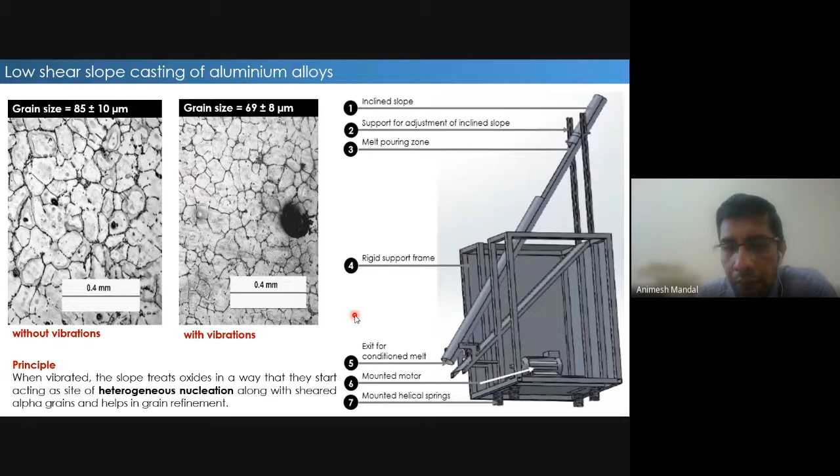So this is a slope casting process, and I think lots of labs are using it, and this process has also gone into some industries to produce what we call non-dendritic structures.

Another important area, as a mechanical or manufacturing engineer you must be interested in, is additive manufacturing of aluminum alloys. Lots of work is going on here. Though I have not specified numbers, it's all written in terms of X, but the target is that it's a huge market.

It has been applied to almost all the materials around you in such a short span of time, and aluminum alloy is no exception. The market projection is till 2028, so it's expected that the market is only going to pick up.

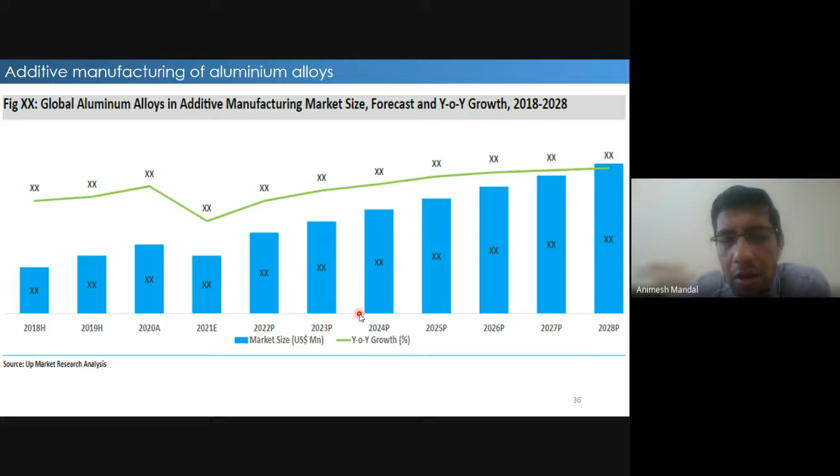I'm not getting into the details of additive manufacturing. As you must be aware, it's nothing but layer by layer processing of components. That's the beauty - you can technically make any complex shapes using this process.

It's a very promising technique, but of course it has its own limitations. One being the cost - that's a major limitation. But from a microstructure point of view also there are certain limitations as of now, though I am sure it will be overcome in due course of time.

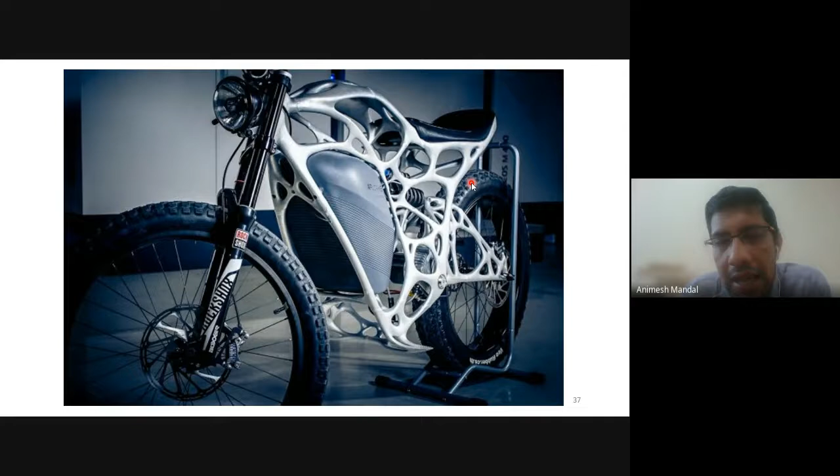Lots of groups are already working on this additive manufacturing of alloys. So what's the scope of this research in aluminum alloys? Lots of scope, though I have listed only a few of them.

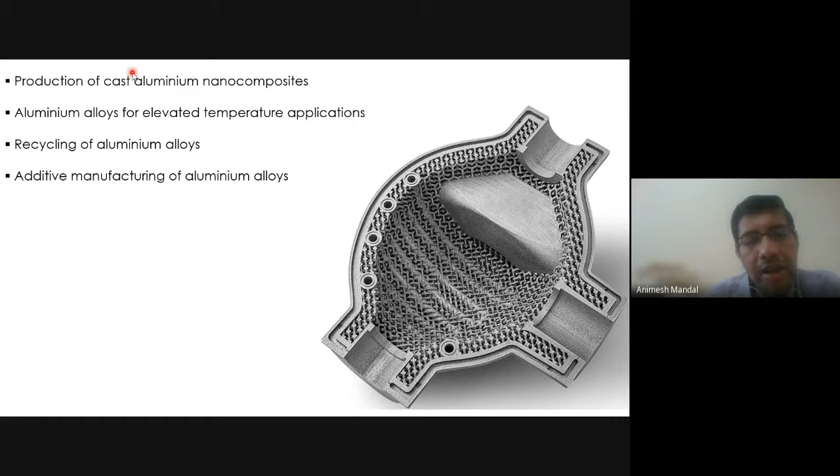The few of them being production of cast aluminum nanocomposites. Aluminum nanocomposites using powder metallurgy have been investigated and studied in quite detail, and it's relatively easy to manufacture. But using powder metallurgy, the limitation is the size - you cannot make very huge sizes of aluminum nanocomposites using the powder metallurgy route.

So the answer to this is whether we can make these aluminum nanocomposites using a liquid metallurgy route or a casting route. It's not that easy - the challenge in making these aluminum nanocomposites is the dispersion of nanoparticles. Generally nanoparticles tend to agglomerate, and there are other issues associated with dispersion. So if you can produce these cast aluminum nanocomposites on a commercial scale, nothing like it.

Lots of work is being focused on aluminum alloys for elevated temperature applications, which I discussed in quite detail in my last FDP talk. Those who have heard it must have understood.

This is something which is quite exciting - to find newer and newer aluminum alloys for high temperature applications.

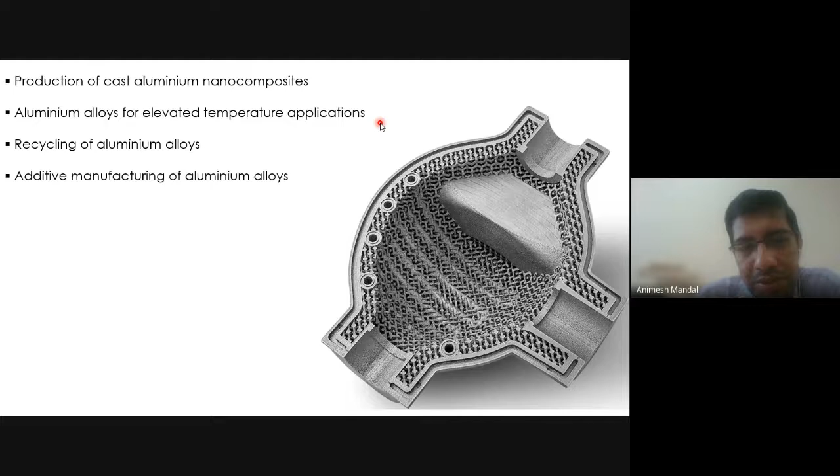The other focus of research in almost all countries is circular economy - you must have heard this word. That means using all these alloys round and round, basically recycling all these alloys. But again, it has its own challenges and issues that need to be addressed.

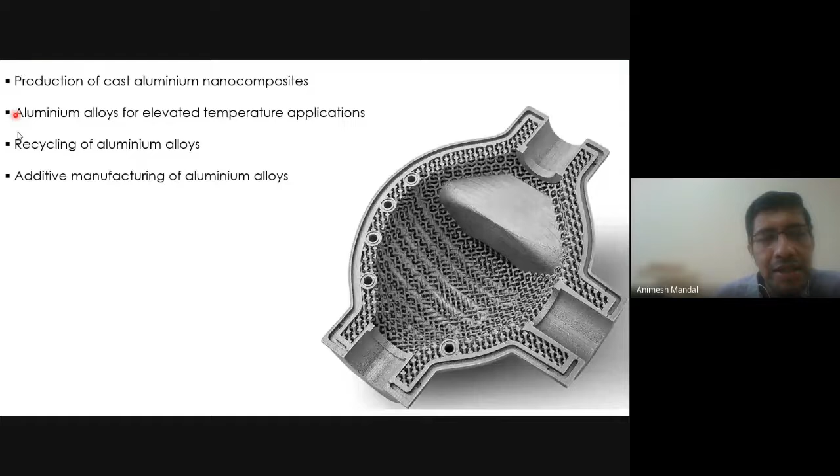And lastly, as I mentioned, this additive manufacturing of aluminum alloys is picking up, but again this also has its own merits and demerits. But these are certain areas where if anybody is interested should think about working, because this is something which is going to stay here for quite some time.

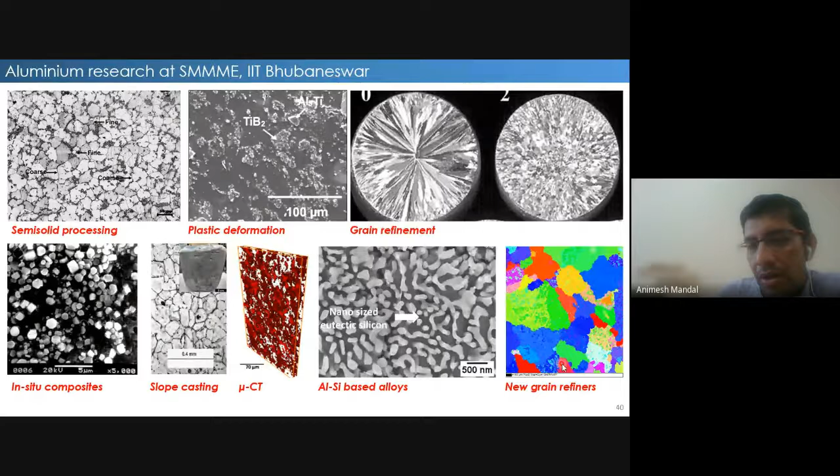We work on in situ composites. We work on some other processes like slope casting, and we have some collaborations which help us understand how agglomeration of particles can be studied using micro CT, micro computed tomography techniques. Then we work on different aspects of aluminum silicon based alloys and develop new grain refiners for the industry, because this is quite exciting - ultimately you need to grain refine all your aluminum alloys.